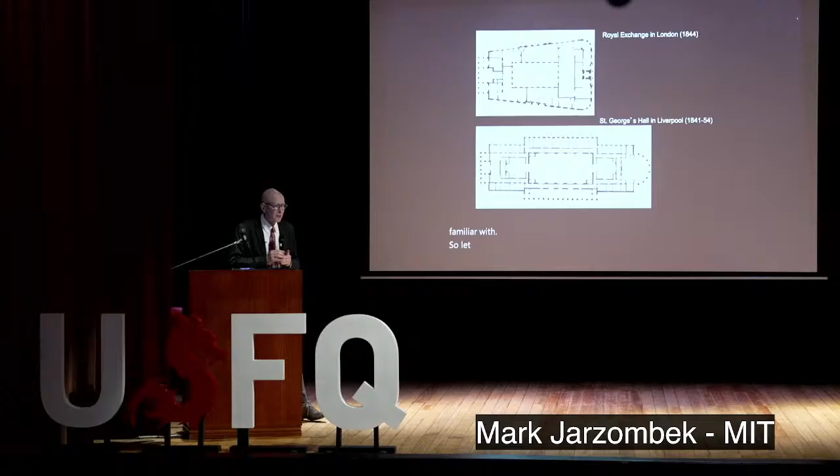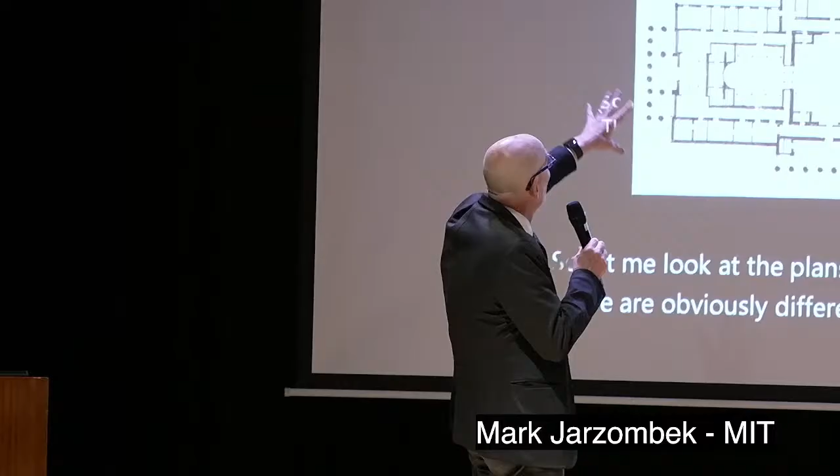There's a plan with obviously different programs - this is a hall, this is an exchange building, so they'll be slightly different in their configurations. But the point is that the Royal Exchange building comes out of a way of planning buildings developed in the previous century, where you basically have five buildings in one box. It's like going to the grocery store and getting an apple, an orange, a banana, putting it all in a bag, and calling the bag architecture. But when you look into the planning, you realize you've got actually 5 buildings sort of swooshed together around this courtyard. And that's a little strange.

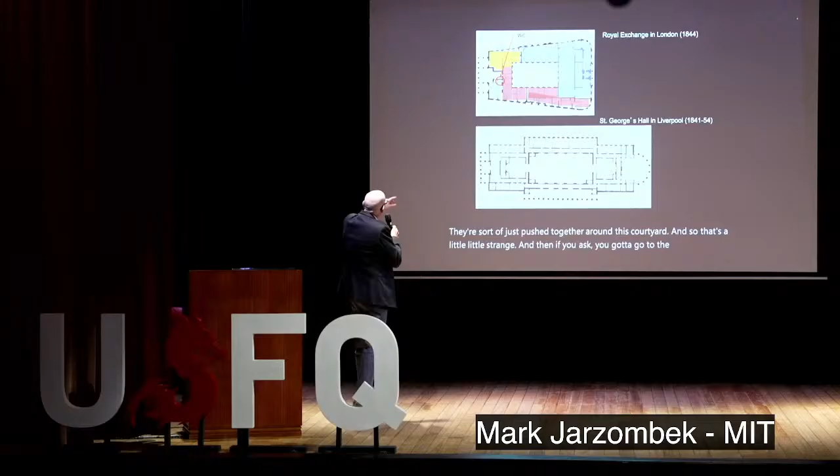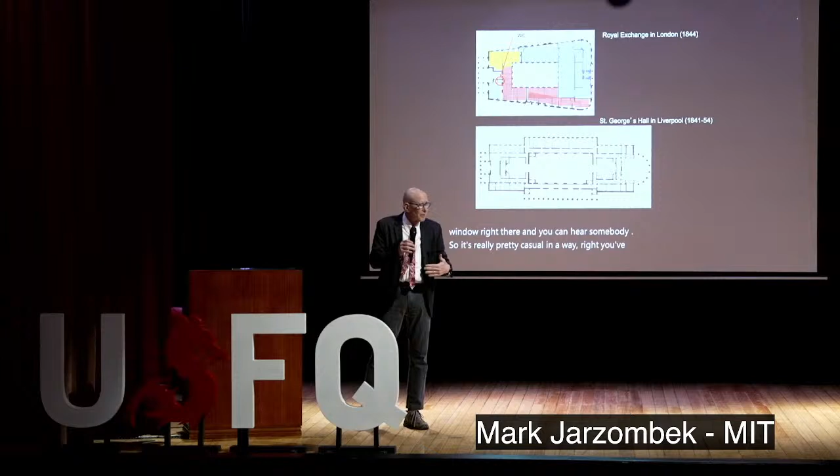If you ask to go to the bathroom, it's right there by the entrance portico. So you have the portico, your great columns, and there's a little window right there, and you can hear somebody pissing. So it's really pretty casual in a way, right? You got the box, you got your frame, and then you fill it with stuff. And for a long time, in what's called Baroque architectural planning, that was perfectly fine.

St. George, built more or less at the same time, has a very different plan, as we can look at it, and it has in the original plan this word, corridor. Now, I'm a bit of a literalist, so I found that sort of interesting. Why would they label the corridor? Why would that be labeled as such, right? Because it might seem pretty obvious.

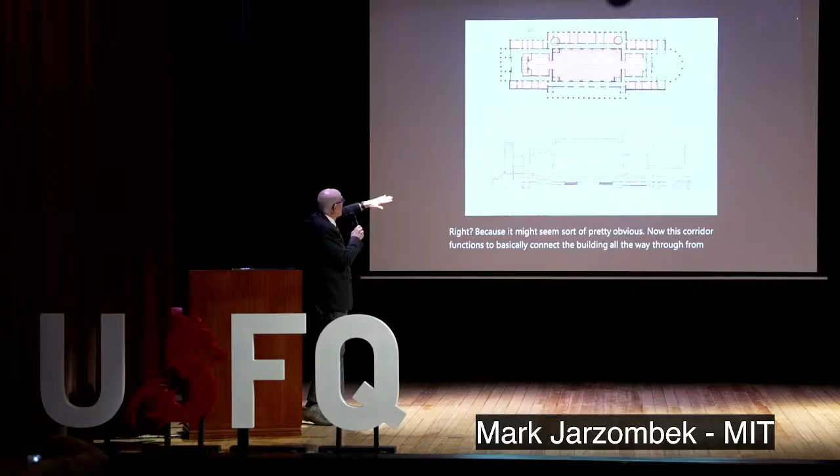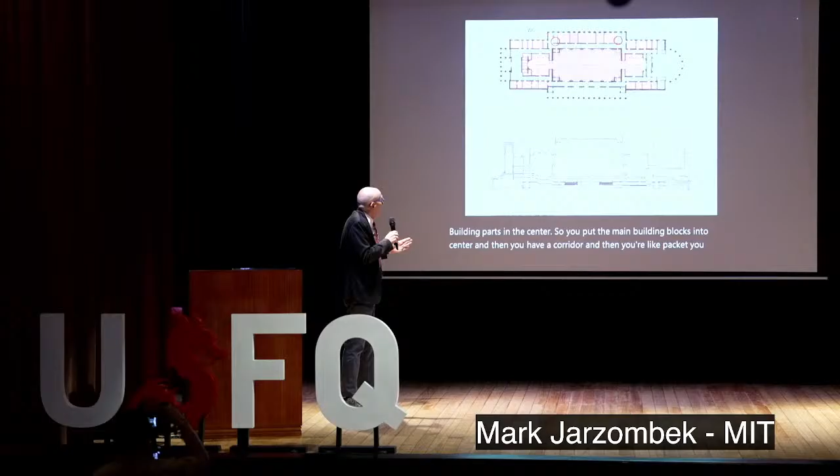This corridor functions to basically connect the building all the way through from front to back or side to side, and it separates the rooms on one side from the main building parts in the center. So you put the main building blocks in the center, then you have a corridor, and you pack rooms onto both sides. You can see that the front colonnade is basically just for show - it's called a neoclassical building, but whoops, there's nothing behind it.

And then you got the real stuff, right? It's a little bit like your own little building that imitates the first house of the founder, and you have this fake front on it. Well, that's the same thing, except this is in ginormous scale. So to call this a classical building is really weird, because it was already deploying classicism as just a facade, and it had this new idea about how buildings are organized, which is through this corridor.

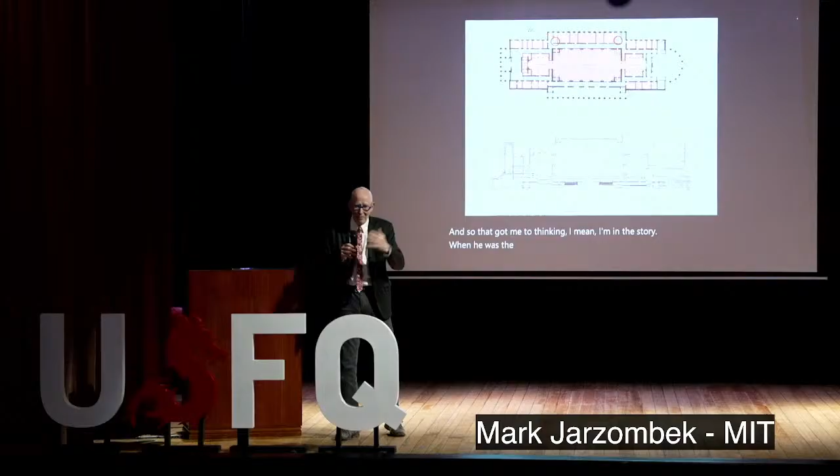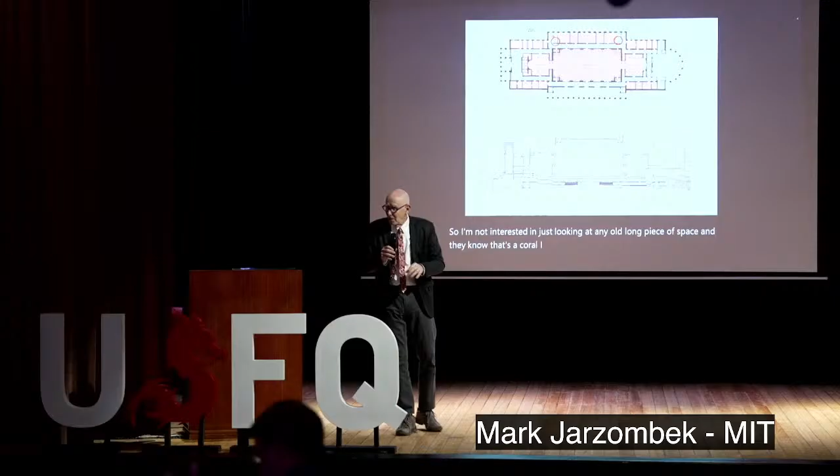And so that got me thinking - well, I'm a historian. When was the first corridor? Where can I find corridors like that, and I have to find them labeled. I'm not interested in just looking at any old long piece of space and saying, oh, that's a corridor. I want to find the label. So like historians do, we hunt around and we find these things.

Well, the Spanish Empire was a very peculiar empire. It had holdings in the Americas, as we know, but it had holdings all over Europe in funny places. And one of its geniuses was connecting those places by information. It's sort of like if you have knowledge, you need to know where the boundaries are, you need to know where the military situation is - you have to have really up-to-date, the latest knowledge, to be successful as an empire and for military purposes.

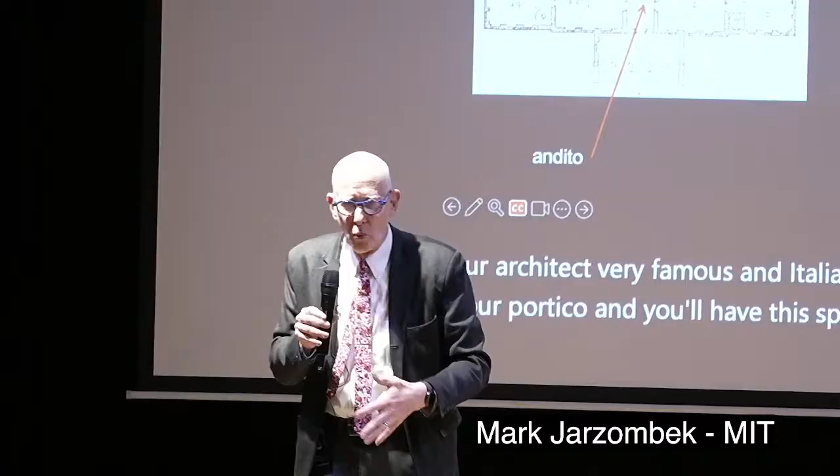Now we can compare that with Palladio. Most architectural students will know Palladio is a very famous Italian architect. In Palladio you'll have your portico, and then this space, which is an andito. Andito comes from 'to walk,' andare. So in Palladio, you walk into the building.

Buongiorno, come sta? Ah, va bene, and so on. You put down your coat, you hang your coat, you want some vino, maybe some aperitivo. Not this guy — here, you open up the door and the guy's running in, Signora, Signora, you run into this building.

So it's a completely different attitude about how you enter a building. You can walk in the Palladian sense, or you can run in the Spanish imperial sense. All of a sudden you can see there's a change of attitude about entering the building — this little piece of space that's completely insignificant spatially, but carries a powerful message to your friends, your clients, and so forth.

So it changes from a purely military point, like Vasari's corridor, which is military because the guy doesn't want to be seen out in public — he might get shot or killed — to actually something you want to show off. You want to show off that you have corridors in your palazzo. So people got it and caught on.

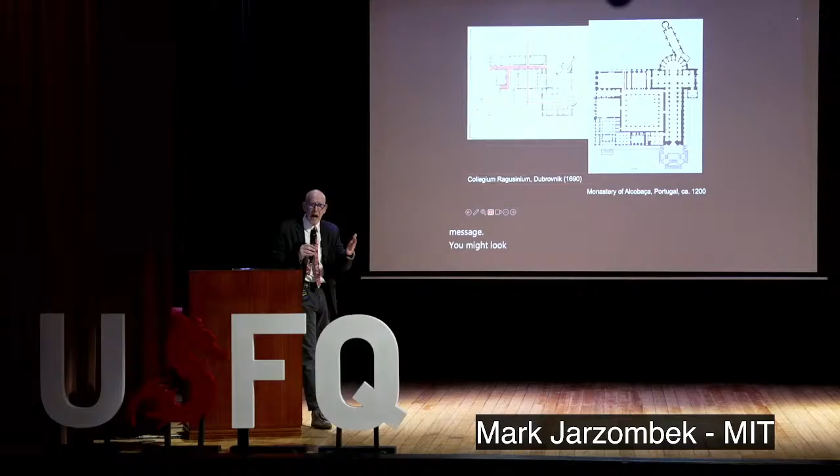So you might look at this, to the untrained eye, and think it's all just like the same old stuff. So if we compare it to a medieval monastery, we have the church and the monastery, and it's got a courtyard and all sorts of things that might look like corridors, but they're not corridors. The Jesuits basically deployed the corridor in their buildings specifically to outline this sort of military jargon and the expeditiousness of information.

Now, you don't have to go very far to prove this. We were just last night at the Jesuit church here in Quito, and we were wandering around — I assume all of you have been inside it — and you go to this little desk, and you can see there's a plan. So we went to the plan, and we looked, as like any good architect would, and said, oh, that's really cool — and look, 'corredor.'

Now you could say, okay, that plan was printed 10 years ago or something — how do we know that back in the 16th or 17th century it was a corridor? Well, I don't know, of course, but my guess is it was a corridor, because all the Jesuit institutions had these things, and the fact that it has survived all these centuries and is still labeled a corredor must mean something.

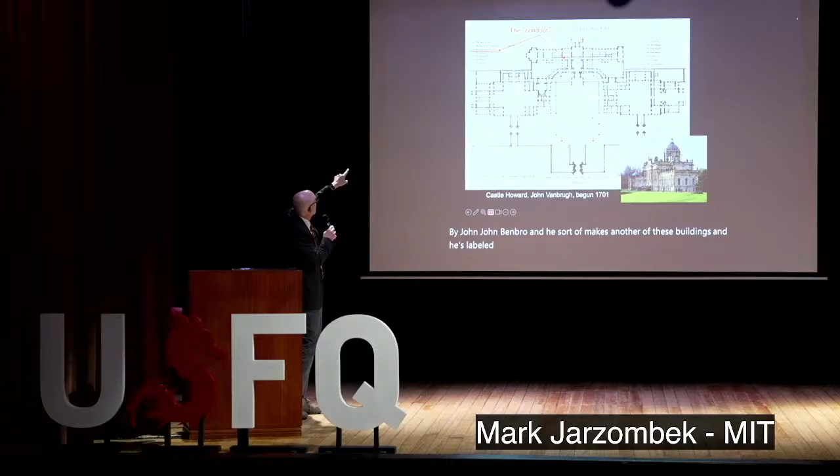Now, the English had always liked the Spanish. They always had a little bit of a fixation about Spanish culture and this and that. But now that they were on top of the heap, they actually had to sort of borrow this word. So here's Castle Howard, by John Vanbrugh, and he sort of makes another of these buildings, and he's labeled it there. You sort of see the corredors, and the wife of the owner basically wrote him a letter and said, 'I'm looking at your plan, it's really lovely. There's this weird word in there called corredor. Could you please explain to me what that is?' And he writes back and says, 'Oh, don't worry about it. It's something from the Spanish. It's fine.'

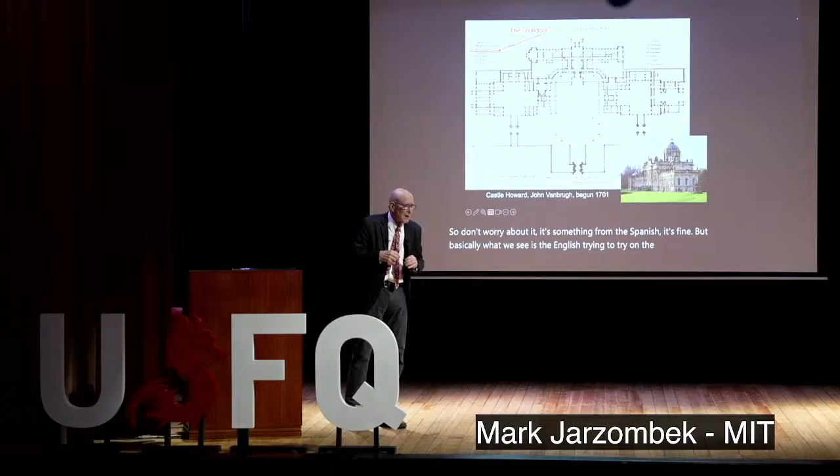The corridor is not just a space for fleet-footed young men with swords, it was for the state. It was where you had sort of dignified walking, but imaginary running relationships, right? So what we get is a shifting here about where the corridor is located. First, it was literally young men running around. Then it went into, obviously, sort of the military jargon. You wanted to have this corridor because it showed that you were connected militarily, right? And then the Jesuits, which is sort of military, in quotation marks, right? And then, of course, when it gets to English, it is military, but it's empire, but it also gets put into a different world, which is the world of, let's say, government and governmentality. So, so that we can sort of see.

Now, the French never really warmed up to the corridor. And the French had these things called the enfilade. So if you wanted to go through a palace, you basically made rooms, and then you cut out a tunnel of doors, and you went from room to room to room to room. There's no walls, right? There's no corridor, right? So this enfilade system was very important in French palace architecture, and as a result, they never really adopted the corridor.

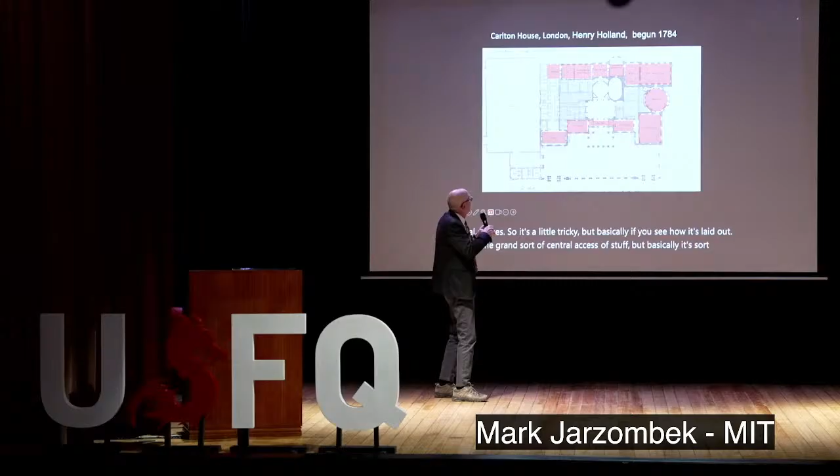And so here we have another example, Carlton House, very famous, from the 1780s. It has this beautiful colonnade in front, a classical Roman thing, and a very elegant, constrained facade. The building went through several phases, so it's a little tricky, but basically it's laid out with a grand central axis - sort of Palladio, but cut and unfolded. It's strung around, and everything in gray is service - that's where the servants, cooks, and the people you don't want to know about would be. So there was this ingenious system where you have a lot of outdoor volume to look at the gardens, and the inside is used for cooking, servants, and laundry.

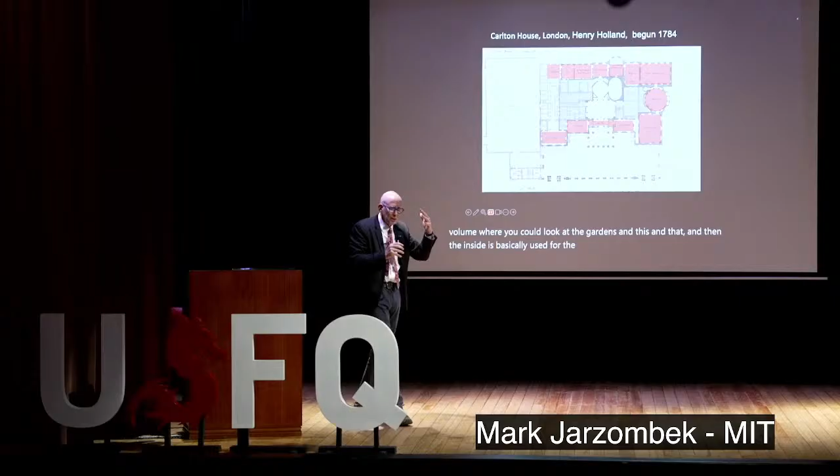Now this is the US Congress building from about 1800 - a beautiful building with the two Congress rooms, and no corridors. The idea of corridors still made people a little too nervous - it's basically still Palladio. If you wanted to get from the House to the Senate, or back, you had to go through this sort of avocado-shaped room, because they didn't want to make a hallway, so they made this weird avocado thing instead.

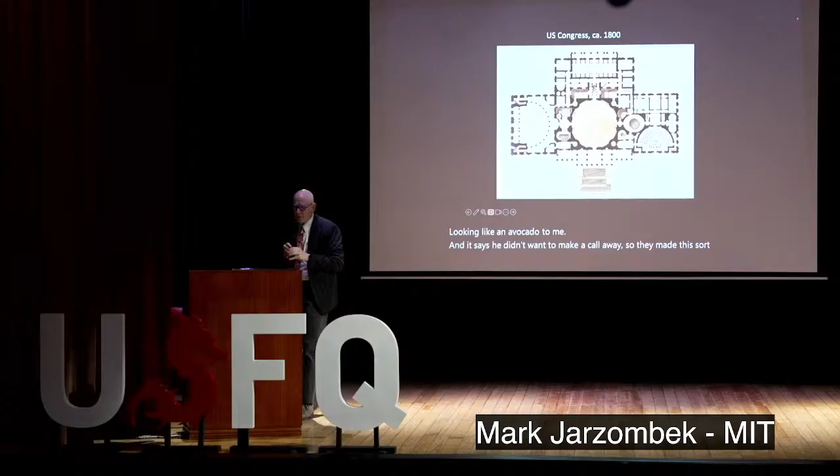And so the English in the early 19th century began to think of the corridor as a bad place. If you read English romantic literature, that's where people get murdered, where bad things happen. Marquis de Sade - he's French, but that's where people did terrible things - in the corridors. So the corridor began to develop this bad reputation.

And so what we see is that the idea of this sort of military Jesuit space, based on the latest technology, comes to England, and they're a little nervous about it because it goes against this French versus Spanish problem. So the corridor sort of goes dark in the planning of buildings, but it pops up again in a new type of building being developed - the barracks.

Military barracks, we might think, okay, there've been military since ever and ever, right? But the idea of barracks is something that emerges in the 1700s and 1800s with the emergence of early states and the attempt to control and define the military as a separate institution, as opposed to just some farmers you give a stick to and say, go and try to kill someone.

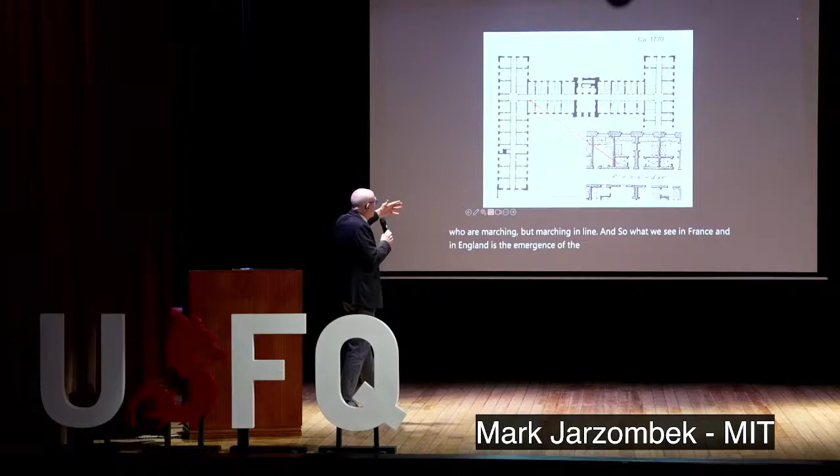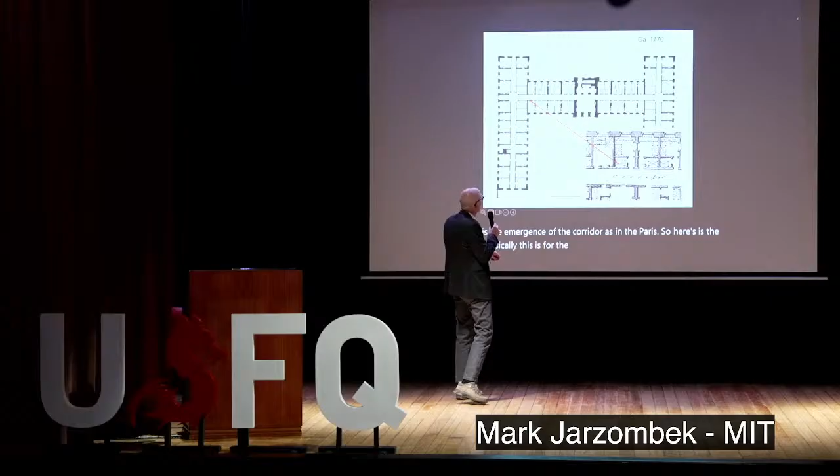And so what we see in France and in England is the emergence of the corridor in the barracks. So here's a barracks, basically for the horse rider elements. There's the corridors, and there's where they would sleep, and their servants would stay here, and the horsemen would stay inside. So the corridor became a way in which you could see this relationship between getting men to move simultaneously and act in a particular way, and the corridoric imaginary.

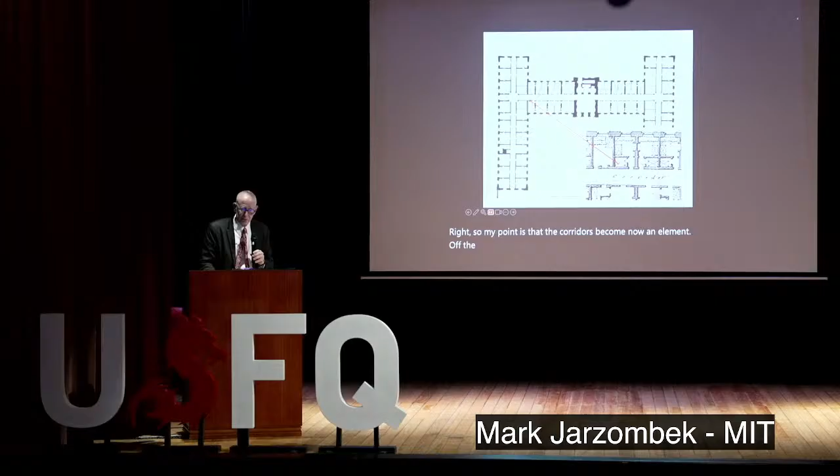So this is like an earlier corridor, an earlier barrack, and you can see it's just a set of rooms with a colonnade in front of it. There's no corridor here yet, right? So my point is that the corridor becomes an element of the barrack cultures. Making men do this makes a lot of sense if you have a corridor where that is replicated.

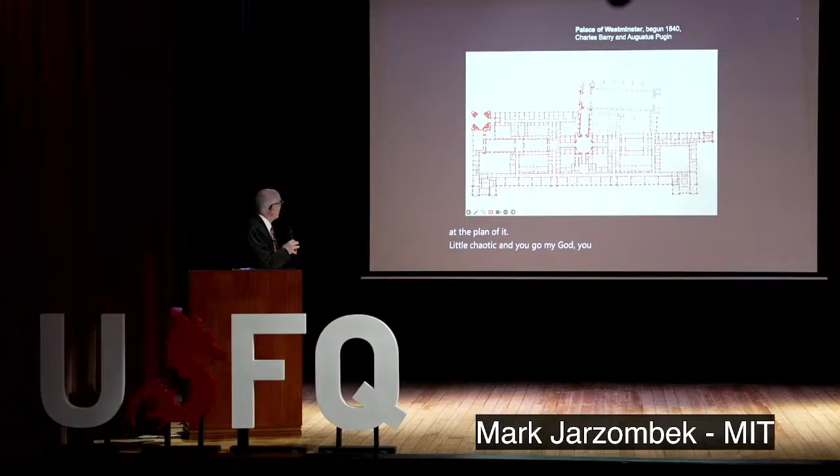Now the whole thing begins to shift very dramatically when we get to the Palace of Westminster, begun in 1840 by Barry and Pugin, the beautiful building in London. If you look at the plan of it, it's a little chaotic, and you go, oh my God, how do you read that? But if you go closer in, you see all sorts of corridors.

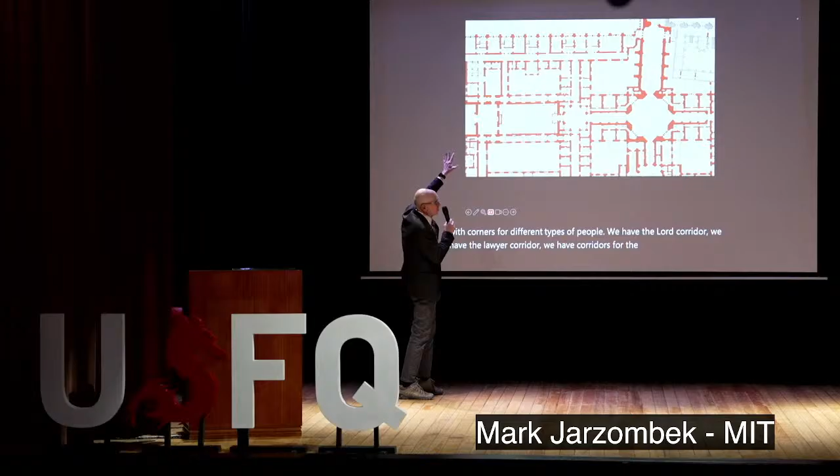This building's interior is nothing but corridors, labeled, right? And it's very important that they are labeled as such. We have the East Corridor, the West Corridor, the Peers Corridor—in other words, corridors for different types of people. We have the Lords Corridor, the Lawyers Corridor, corridors for the peers and private corridor, the Chancellor's Corridor. All of these corridors, when they intersected, would have had a person standing there to make sure you didn't accidentally go from the Chancellor's corridors into the Peers corridors.

No, that corridor is for this group of people, this corridor is for this group of people, this corridor is for this group of people. It's incredibly complicated. Today, if you look at this as an American, or just think of politics, it's hard to understand that we could get a building with these corridors that were for certain groups of people, but that were also exclusionary, right?

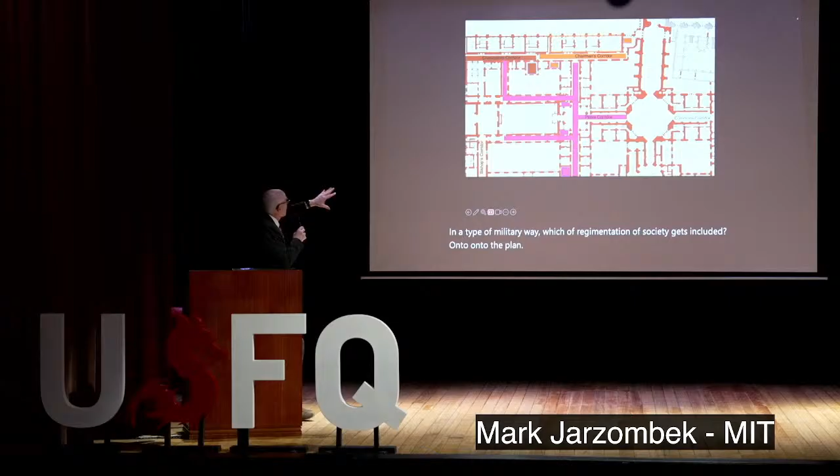So the corridors were no longer military per se, but they were part of the idea that government would now act in a type of military way, where regimentation of society gets imprinted onto the plan. We see all sorts of different corridors which allow people to circulate through the building in their own class structure. So the corridor became a way in which class difference could be designed and enforced, but also a way in which communication could happen. It was incredibly clever.

And the most clever of all is the Royal Courts of Justice. Here, in this building, you have the trial lawyers, the judges, the public, the criminal lawyers, the defense lawyers. They all had separate entrances—there are like 10 different entrances.

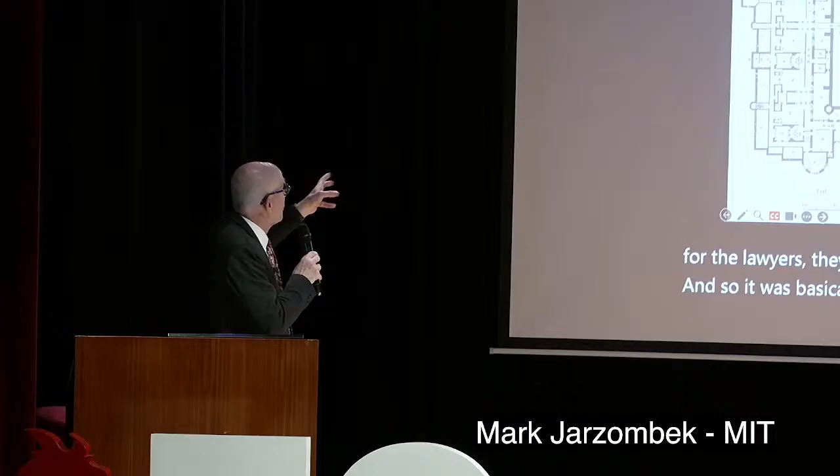One for the trial lawyers, and they get into their corridor. One for the judges, and they get into their corridor. One for the lawyers, and they get into their corridor, and so forth. So it was basically a machine, like a corridoric machine, that got people in and out and through this building. Apart from the courts themselves, it's pure corridors—just corridors, and then there are some boxes, boom, boom, boom, boom, which are the courts.

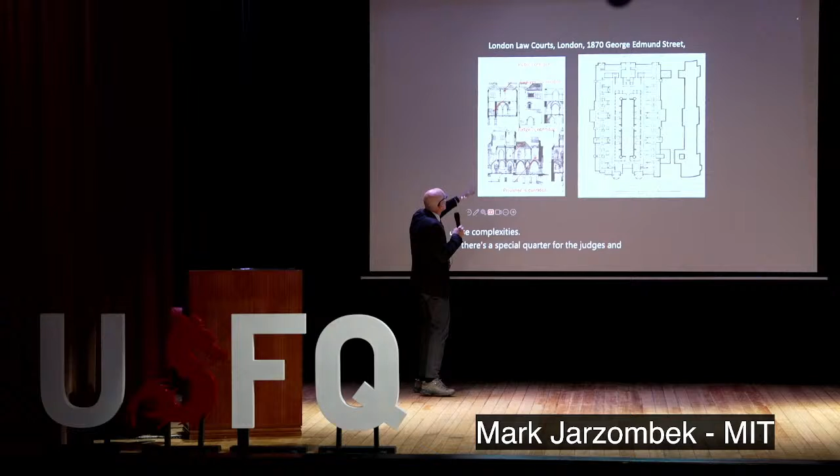So what we're seeing is a development of the corridor as a place to organize an increasingly complex society. We no longer have just good guys and bad guys. We've got lawyers, judges, the public, victims, and they shouldn't talk to each other, or could talk to each other, in particular ways. So this building basically helps you navigate all of these complexities. There's a special corridor for the judges, a special corridor for the prisoners and the lawyers, a special corridor for the public, and so forth.

It had a lot to do with the reformation of the legal system taking place in England at the time. Particularly, one of the things was divorce. It used to be in England that to get divorced you had to go to the priest, and the priest would say, man, I don't know. So in the mid-19th century, you could get officially divorced by the government instead. But that meant you needed divorce lawyers, and who wants to meet your divorced wife if you're not on the corridor or anything like that.

So one of the reforms that took place was divorce law, and one of the reasons they built this building was to handle, all of a sudden, the thousands and thousands of divorce cases that were previously handled by the church. And that brings us back to this building, which we looked at before, St. George's Hall Concert Hall, and we can begin to appreciate its innovation.

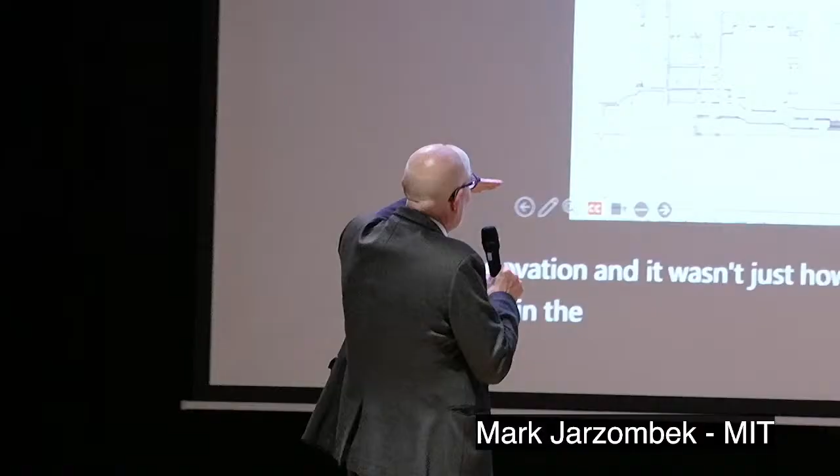It wasn't just how you circulated the building — in the basement, the corridor allowed the ventilation system. This was the first building with a building-wide ventilation system in the world. It was extraordinarily complicated, with hot water, valves, vents and fans going up into different rooms. All of that could be put in these corridors, so the basement corridor was, in some sense, another attribute of this modernity, facilitating a large building requiring movement of air.

People were concerned that in a large building you're going to get sick, get pneumonia — it's not healthy. So there was a lot of study about health, and people thought air movement in large buildings was important. But how do you do it? In winter it's even worse, because you have coal stoves, coal exhaust, and carbon monoxide everywhere. It's a miracle they survived the 19th century.

These studies were done by the architect, who eventually went to the United States and continued his work there. So Americans came along and said, oh, the English have these corridors and they're really great, we want corridors now. The Brumidi corridor was built in the Capitol building — you can see the old Capitol building there. Then they said, we're gonna do bigger and better, so they rebuilt it, and this time they put a corridor smack dab in the middle of the building.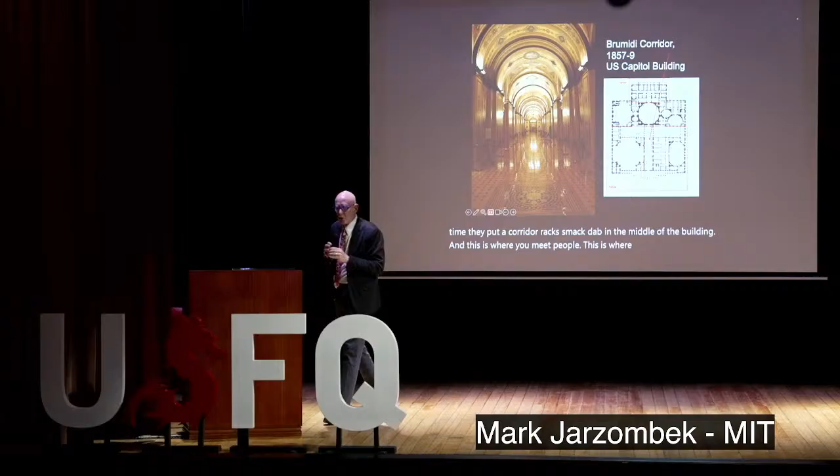This is where you meet people. This is where you talk to people. This is where you negotiate. This is where you hang out. And so this corridor became sort of the locus of political conversation in the United States.

And of course, soon other government buildings followed suit. So you can go to almost any state house in the United States and see the display of these corridors as basically ways in which you moved about.

A gentleman takes off his hat and holds it in his hand when a lady enters the elevator in which he's a passenger, but he puts it on again in the corridor. The public corridor is like a street, but an elevator is suggestive of a room, and a gentleman does not keep his hat on in the presence of ladies in a house. So there was a lot of discussion about how you behave in a corridor — it's a public space in a building, not a private space anymore, and so you have the right to not take your hat off, which you would do in an elevator.

And then schools got built in Germany and in Switzerland and elsewhere, large schools built by the nation state, like the ETH in Zurich, TU Berlin, and so forth. These are huge, enormous buildings, and they had corridors called the akademische corridor, the academic corridor. A visitor walking through the corridors of the universities in Zurich, from the speech he hears, couldn't tell what country he was in. So this is a moment where the celebration of corridors and publicness and interaction is brought to bear.

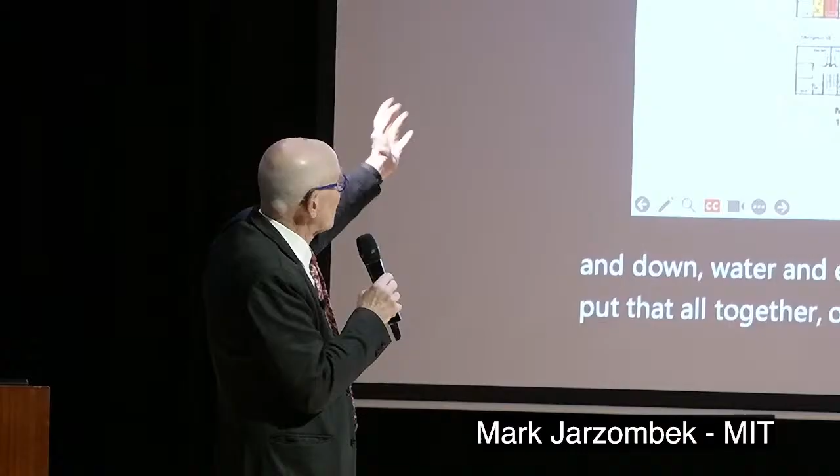Because things go vertical, right - you're going up and down. Humans go up and down. Water and electricity and sewage go up and down. So let's put all that together in one package, and then everything else is just living. That makes a lot of sense to do.

Well, right down the road, Corbusier was making his building - this is his famous example, all very modern, people call it modern architecture. Who wouldn't say Corbusier is modern architecture? But Corbusier, being French, separated the movement through the building from the logistics of modernity - the water, the sewage, and so forth. He didn't put those two things together like you'd normally do with a corridor in mind. So how does this building operate? Here's the plan of it.

And you can see on this wall here, he lined up all the things that were wet. We have the toilet, then the kitchen, then the bath and the bidet. In a very French way, the bidet looks all the way down enfilade the entire facade.

Just love that. No? Did I get that? Everybody know what a bidet is? Okay.

All right, so we can think of it this way: the bidet, kitchen, bath, that's all along that wall. That means that wall has pipes in it. Those pipes got to go somewhere, and no one's going to tell you this except me, but they go here. You can see this bump out - that's not a column, it's a structural wall. It's a fake colonnette, right, in which are the pipes.

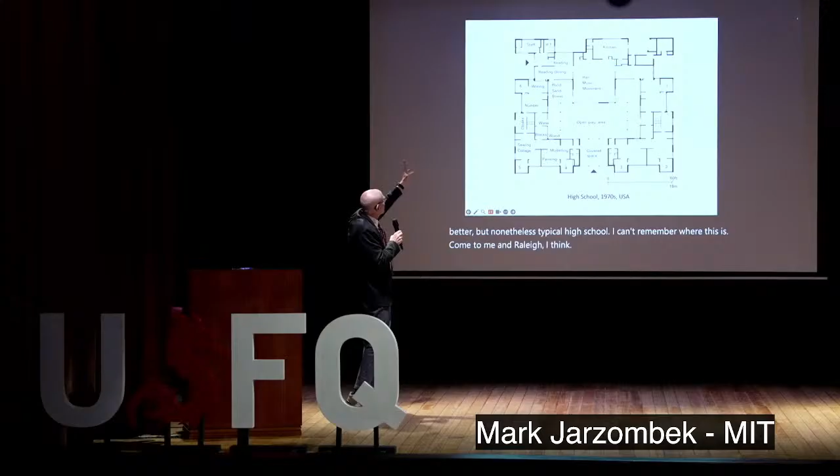So here's another slightly better, but nonetheless typical high school. I can't remember where this is, maybe Raleigh, I think. And you can sort of see, no corridors, right? It's sort of Palladio with a courtyard, in a way. So you go from room to room and place to place and so forth.

And then, to make things even more profound, this guy called Robin Evans, a very famous architectural historian, people know him on the architectural history side, he wrote an article called Doors and Passages in 1978. And in this article, he says, I'm going to tell you about corridors. And he says corridors were invented by the Protestants because of their work ethic, and they're narrow and constraining, and we don't want to live in this sort of narrow little Protestant world. We want to have the grandezza of life. We want to feel that we can have the beauty. Just imagine, he argues, that the Virgin Mary

gave birth in a corridor. I mean, it boggles the mind, right? So he basically looked at the Italians and said the Italians didn't have corridors, and look, they had this wonderful culture. We have corridors, and look at our culture. That it was invented by the Protestants is 100% bullshit. There's absolutely no truth to that at all, but everyone believed him because he's a historian. And so it's like, oh my God, the historian says it was invented by the Protestants, and that really can't be good, and so we want to go back to Palladio.

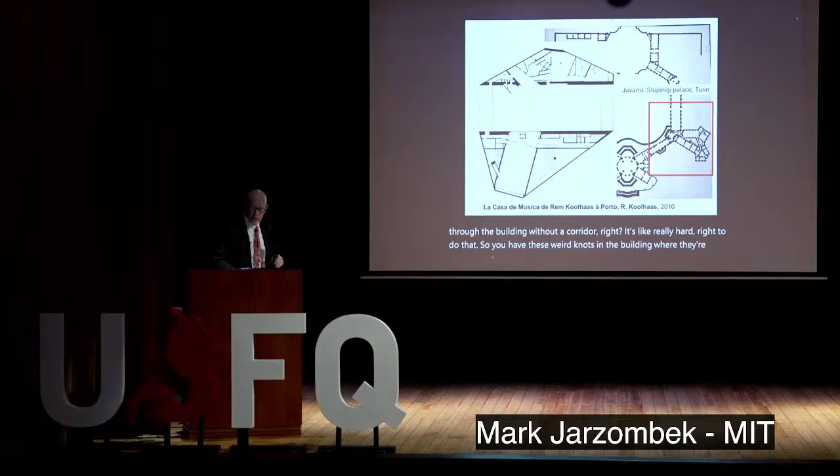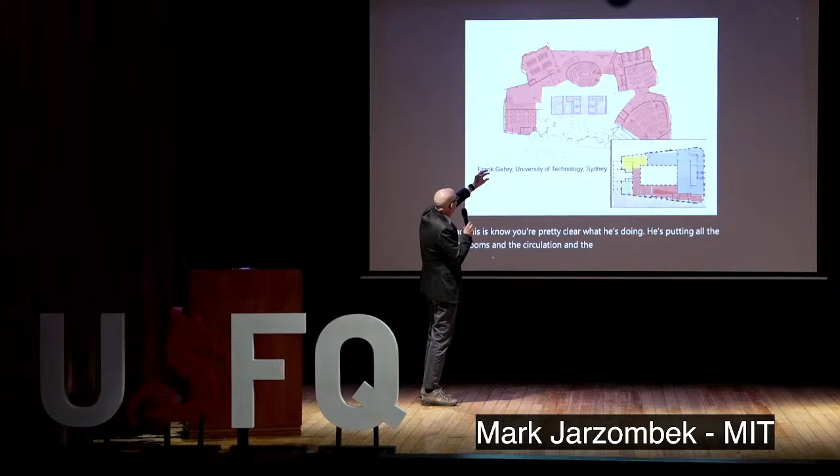Frank Gehry, of course, is the great exponent of the anti-Corridic movement. This is in Sydney, and it's pretty clear what he's doing. He's putting all the bathrooms and circulation and kitchens in the center, like an invert of a courtyard. And then in that Palladianesque way, putting all the program, unfolding it around, into the perimeter.

All right, so I want to summarize a little bit. The corridor is this incredible moving thing, it's not a single structure, it's not one word, corridor, but what I've been trying to show is that it starts as an addendum to a palace, then it goes into the body of the building with the Jesuits. The English adopted it, but ultimately they reject it. Then it goes to prisons, or barracks, back into the military world, until we get into the 19th century. Then the English just can't get enough of these corridors, and the corridors are basically this signage of professionalism, of bureaucracy, of coloniality, of imperial majesty. The Americans fall in line with that. And then when that ends, we have it living on in the modern office building and hotels and things like that.